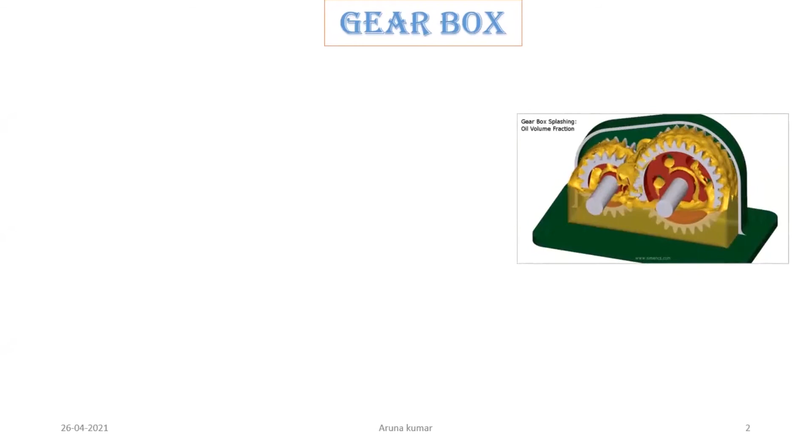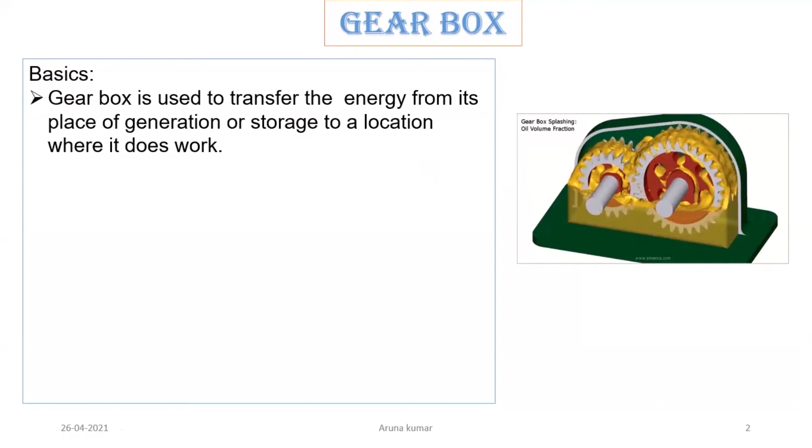So first we'll see a typical gearbox. You can see here it is rotating - this is a single stage gearbox which is rotating. As I explained, a gearbox is used to transfer energy from its place of generation. The place of generation is your prime mover, to the location where it does work. So depending on your work, where we are using it, we will be transmitting the power to that.

The gearbox can be of two types: it can be a step up drive or step down drive. Step up means, in the case of step up versus step down, the words we use - step up and step down - are with respect to speed.

It is not with respect to torque. We always talk step up and step down with reference to speed only, not torque. Step up means increasing the speed, step down means reducing the speed. But in most cases, 95% of the time, we use a reduction in speed drive, that is step down gearboxes only.

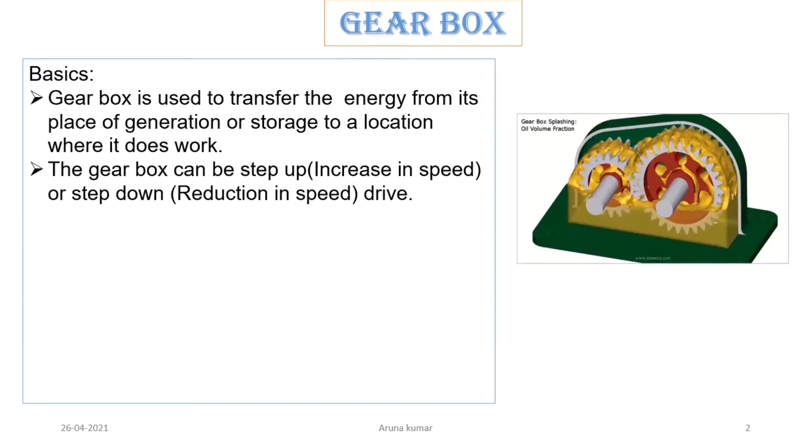Why do we use step down gearboxes? Because in step down gearboxes, the speed is coming down, and when speed comes down, torque increases. We require higher torque, particularly when starting and moving the element from a lower speed to a very high speed.

So always we go for a higher torque purpose. Most cases, 95%, will be using a step down drive only. It doesn't mean step up drives are not there, but chances are very rare, because the output shaft torque always will be more than the input shaft. So they are called reduction gearboxes, meaning speed comes down and torque increases.

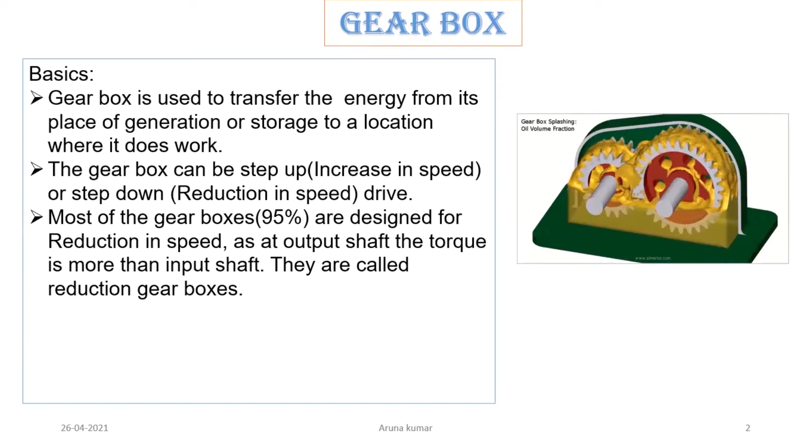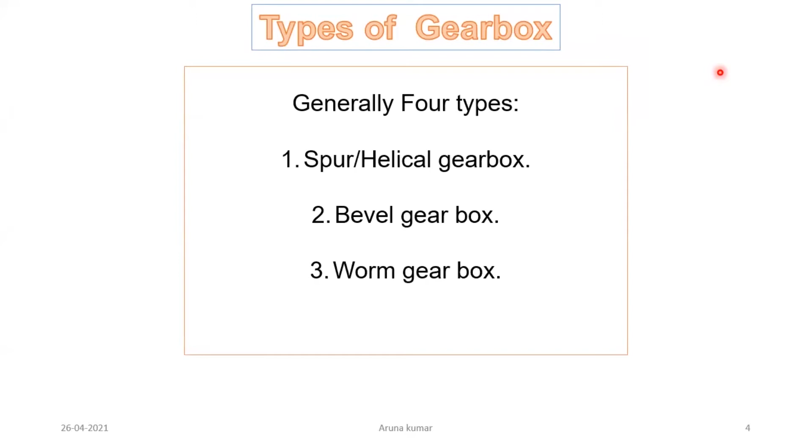What types of gearboxes are there? Generally 4 types with reference to the type of gears we use. One is spur and helical gearbox. Second is bevel gearbox. Third is worm gearbox. Next is planetary gearbox.

It is the spur and helical gearbox, bevel gearbox or worm gearbox - why we call them separate is because of the input to output side relationship, depending on your application. If you require parallel shafts, you go for spur and helical gear. If you want the transmission moved at 90 degrees, you use a bevel gearbox. If you have a non-intersecting and non-parallel arrangement, and want very high reduction, you go for a worm gearbox.

The fourth one is a planetary gearbox, which nowadays is becoming more and more useful in EVs, particularly electrical vehicles of 4-wheelers. Mostly planetary gearboxes use spur and helical gears only, but you get very high reductions, depending on the methodology of manufacturing. In this case, the output to input will be almost inline - meaning the input axis and output axis will be in the same line. In that case, planetary gearboxes can be used.

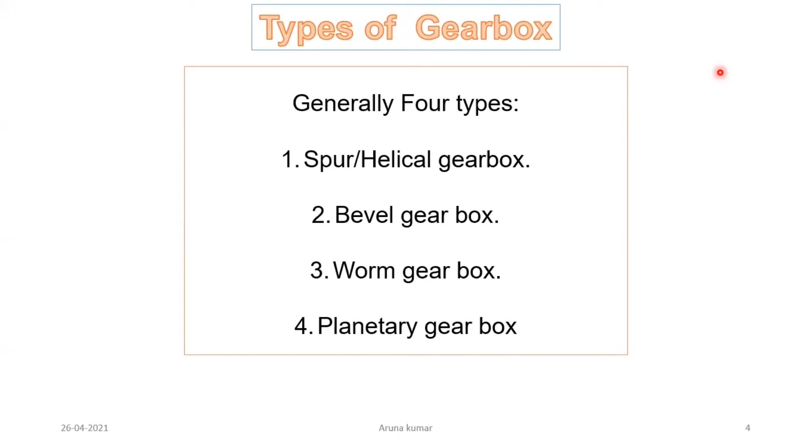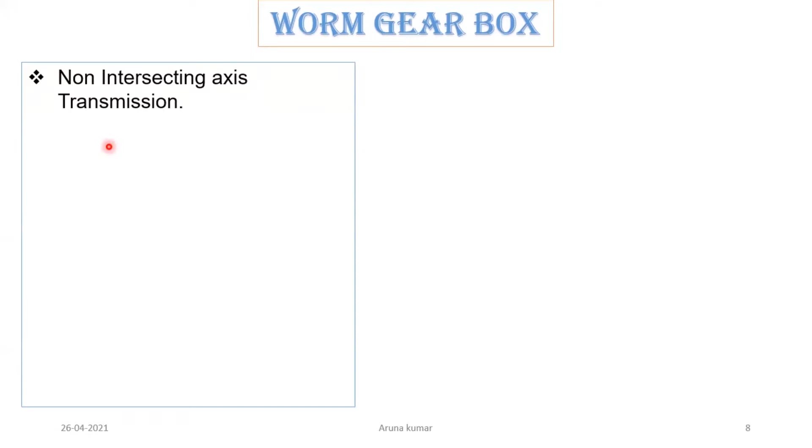This is one important thing in worm gearboxes compared with spur, helical and bevel gears - you can get very high reductions, in one single stage itself. Depending on the selection, you can go up to 100:1 reduction very easily using a worm and worm wheel.

I'll talk about non-reversible - what non-reversible means is low efficiency. It will be 30 to 80% efficiency only. It cannot have very high efficiency because the reductions will be more. The important reason efficiency is low is because this is a non-intersecting axis.

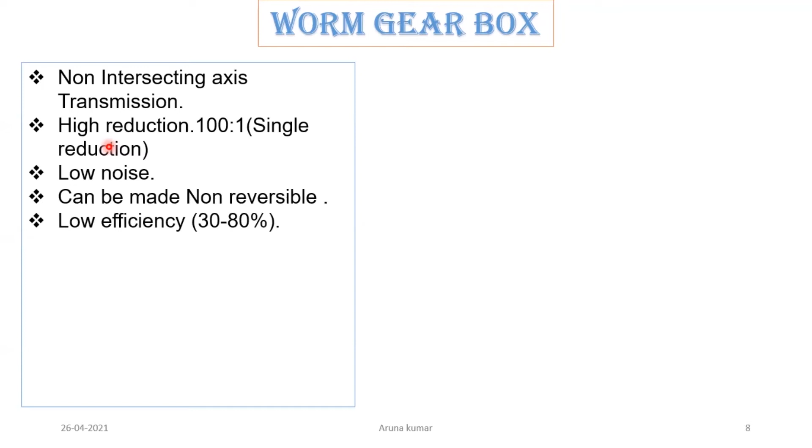I'll show you the picture, then you may understand. When you come here, you can see, sir, this is your worm, that is the input shaft. Here to fix the motor, they have given a flange. This is the output shaft. If you really understand, when you rotate the input shaft, it moves this one - not just like a spur and helical gear with only rotary motion. Here, it is not only rotary motion, there is more of a sliding action, a linear motion will be there.

Linear motion means actually this doesn't move, but because it is a worm, the movement will be like a screw and thread, screw and nut. The axis movement will be a sliding action. The movement from worm to worm wheel will be through a sliding action, not a rotary motion.

In the case of spur and helical gears, there is contact and continuous rotary motion. In helical gears, slight sliding motion will be there. Whereas in the case of worm and worm wheel, the motion is 80 to 90% through sliding action only.

Because the sliding action is more, wherever sliding happens, a lot of heat gets generated. Just take your hand, put it on your table, and slide your finger - more heat gets generated. Whereas if you rotate your finger on top of it, heat will not be generated. Sliding means it's moving in a linear movement, and more movement means more heat generated.

So anywhere, whether it's gears or anything, any sliding motion will cause more heat generation. More heat generation means more loss - efficiency will be less, because heat generation causes loss of power. Because of that, power efficiency will always be very low. That's why we get only 30 to 80%.

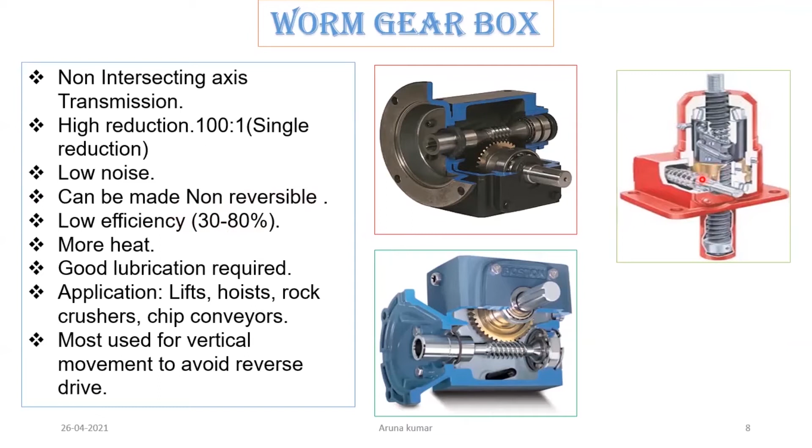So for this slide, if you connect a ball screw to a vertical slide, and motor power stops during operation, if the axis rotates back due to the weight, it should not damage the other side of the equipment. To avoid that, if you use worm and worm wheel, it will not allow reverse rotation because of the locking between worm and worm wheel. That's why it can be made non-reversible if you design the worm and worm wheel such that the lead angle is not more than 6 degrees.

So now, sizing or designing of a gearbox. The important aspect is as soon as you decide to design a gearbox, certain things you have to start worrying about.

One important aspect is it has to be designed for its required load and application. Required load means what load the gearbox has to take care of, not just force but converted into power or torque. The two important factors for any gearbox are: the output shaft connected to your equipment, what power or torque is to be transmitted, and at what speed.

These are the two important things: either power and speed, or torque and speed. These will indicate the load coming into the picture. For torque and speed, you have to design the gearbox.

So from the application point of view, what does application mean? Is it for continuous operation or intermittent operation, a heavily loaded application, or is it going to work for 24 hours or only a few hours? Another factor is whether you are going to operate this gearbox at one speed or different speeds. Depending on the number of speeds and operation, the type of motor you select will vary.

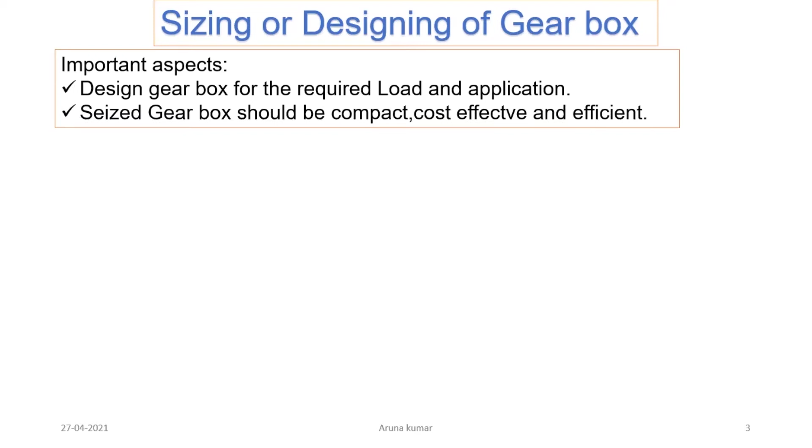It should be cost effective and efficient. Efficient means it should operate without much problem - its transmission efficiency should be as high as possible, and it should not fail regularly. You have to design the gearbox so it works for the planned life - it may be 1 lakh revolutions, 1 lakh hours, or 2 lakh hours. For that number of hours, it should work without failure. You have to finalize this and then make the gearbox.

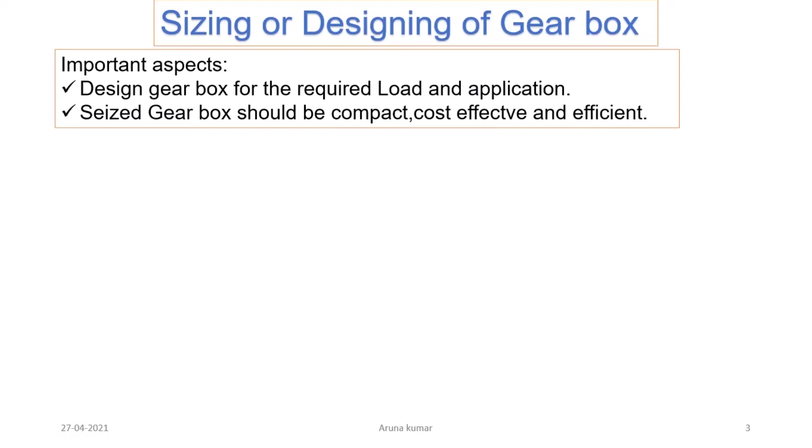Taking these two into consideration, the design of the gearbox has to be planned. These are the major, important initial things. To achieve this, what are all the factors we have to consider? We'll see here.

Factors to be considered. One is the service factor. People can also call it a factor of safety. Why I'm using service factor here instead of factor of safety, I'll tell you. One way it is a factor of safety - how much safety you are giving it, service factor.

Service factor means important is how many hours of working. The equipment you are going to connect to this gearbox - if it is working for 8 hours in a company, or working for 12 hours or 24 hours, based on that the service factor can be decided. If it is 12 hours, you have to use one service factor. If it is 24 hours, something else. If you are using 8 hours, a service factor has to be considered differently.

So hours of working, how much - that also we have to clearly write. Before designing a gearbox, we have to write down all these factors on a piece of paper: how many hours my equipment is going to work. Based on that, your service factor will come into picture. That you have to note down.

Then uniform or non-uniform load or shock loads. That means if the gearbox is connected to your equipment and it is just running continuously with the same power, same speed, and no loads are changing at all, then we call it a uniform load. Continuously same speed, same power, load is there, so same power it will be drawing - that is uniform load.

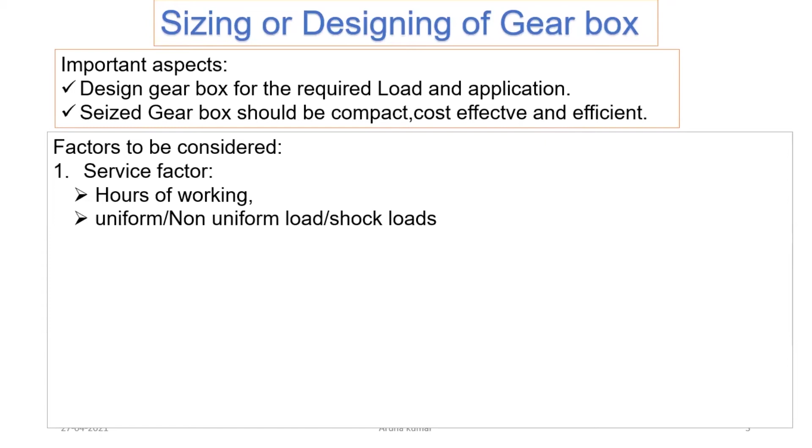Suppose a chip conveyor is there - sometimes it may be carrying, let us say, 5 tons. Suddenly you may try to put more load into that, 5 tons may become 6 tons. So sudden shock load variations are coming - that also we should consider. Based on that, service factor has to be fixed. These are also things you have to note down on a piece of paper before starting a gearbox design.

Then the third one is operating at elevated temperatures. Where the gearbox is going to be put, are we going to keep it in a controlled atmosphere or a different atmosphere? Suppose if you are putting that gearbox somewhere outside the factory, exposed to environment, water, dust and everything, then you have to think differently for elevated temperatures. Elevated temperatures means suppose the gearbox is placed somewhere like a furnace or casting yard.

If you are putting it in casting yards, the temperatures will be ovens and all - very, very high it will be there.

Maybe 200 degrees, 300 degrees, but the environment may, instead of ambient temperature of 40 degrees, go up to 80 or 100 degrees. Based on that, you also have to think about the service factor you have to give. You may have to give a slightly higher service factor. That also we have to consider when deciding the service factor.

Normally if the hours of working is 8, and it is a uniform load and you are working in a controlled environment, a service factor of 1 is okay for you. But if it is 12 to 24 hours of working with non-uniform load, then a service factor of 1.5 is more than sufficient for most applications.

No sir, my application is such that very heavy shock loads will be coming and temperature is very, very high. In that case you can go up to a service factor of 2.

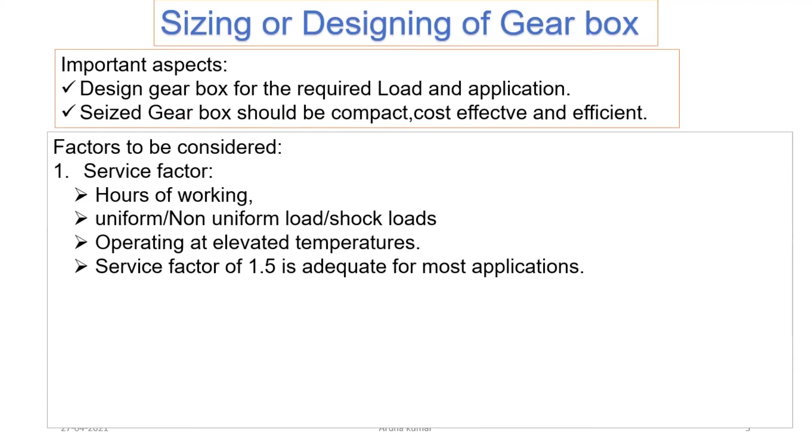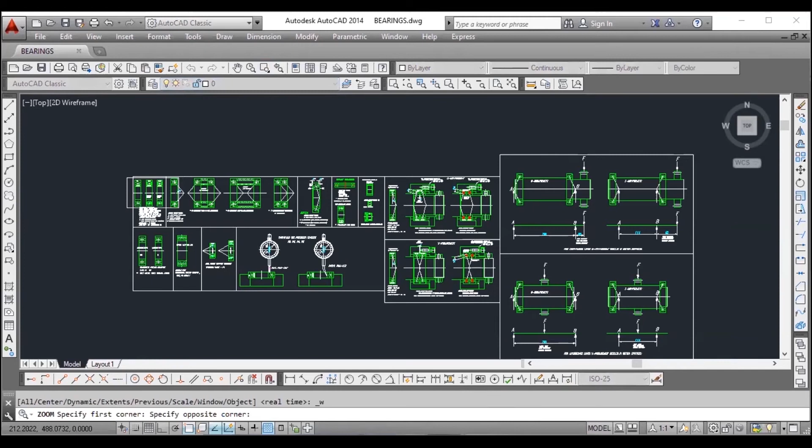Things are all visible. Generally, as we know, in mechanical things, all are visible things. You can feel it, you can see it, and then you can assess their function. So one such element we can discuss today, let us first touch upon bearings in a gearbox. As we all know, what is a bearing? Bearings generally separate two relatively moving elements, two elements which are in relative motion.

There are two kinds of relative motion in any engineering application: one is sliding, linear, and another is rotary. So necessarily one has got a stationary element and another a moving element. Wherever there is a joint of stationary element and moving element, be it linear or rotary, that is the point of concern for a mechanical engineer, how to deal with that kind of joint.

This joint is called a dynamic joint. There are two kinds of joints: one is a static joint and another is a dynamic joint. A static joint is one where you just bolt two surfaces together, that's it, there is no relative motion for a lifetime. But here it is not like that, it is a joint of concern, actually.

It is a dynamic joint because relative motion takes place at that particular place. How to deal with it? Way back, the simplest joint is a sliding joint. Two things just keep one over another and keep sliding, so it becomes a dynamic joint. This is what we call guideways.

A similar concept can also be used for rotary joints. You have got a bush and you have got a shaft. Shaft is stationary, bush is rotating, so it becomes a joint, it becomes a bearing. It could be anything; shaft can be stationary, bush can be rotating. So one is a stator, another is a rotor. Anything can be the stator, anything can be the rotor.

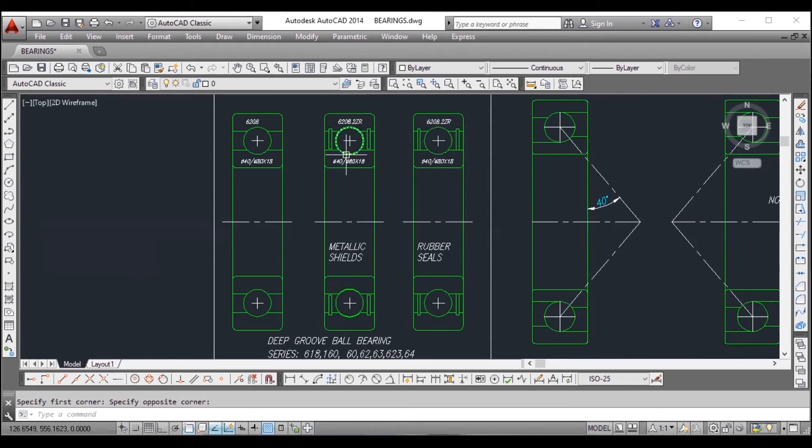Here you see, this is the rolling point in the inner race, this is the rolling point in the outer race. So things are very hard. Balls are hard, races are hard. So all hardened material, and that there is a rolling joint. So they have got a very, very long life. And even after years of use, hardly any play or backlash is created.

So that is where this rolling bearing comes into picture. Today, nobody talks of bush bearing. Bush bearings are there still, of course, but for low speed application. But today, what we are talking about is a state of art application, that is a rolling application.

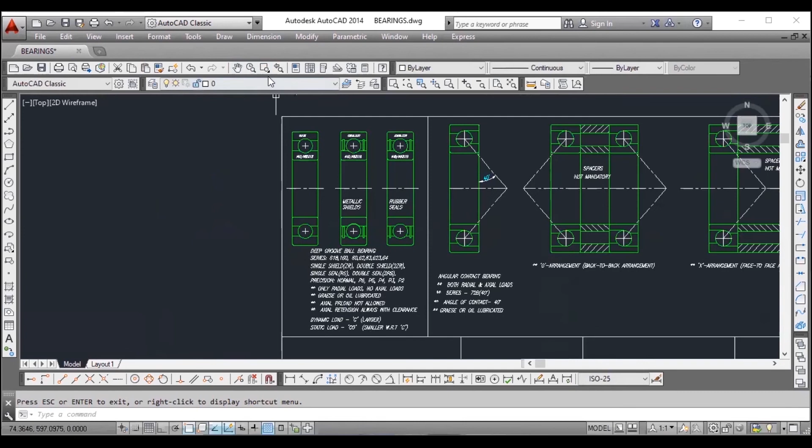So to come to our rescue for this dynamic joint, we have a battery of bearings, a series of many kinds of bearings. They have their own application. So here you see the simplest is this, what is called deep groove ball bearing.

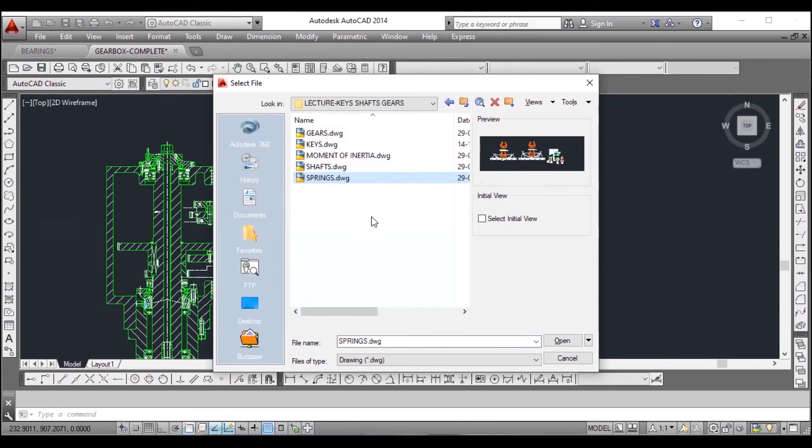Now, let us come to the other elements, shafts and keys. Let us see what are the parts played by the shafts and keys. Keys, shafts, and gears. Let us give a key.

All of us know what is a key. Key is used for transmitting the mechanical power. That's all. So here is a simple application.

Let us say there is a lever and there is a hinge. If I don't have this element, if I remove this element, it becomes a hinge joint, which cannot transmit the torque. If I have to transmit the torque, you have to create this key. So this key will become the transmitting element between driver and driven. So now if you apply a load here, this I have shown as a lever, but it is not a lever. It can be gear, it can be pulley, it can be anything like this.

This is the size of the gear, the size of the pulley, where at the periphery there is a driving load, a tangential load. From this full circle, I have just cut a small piece, calling it a lever. But don't consider this a lever, it is a pulley or it is a gear.

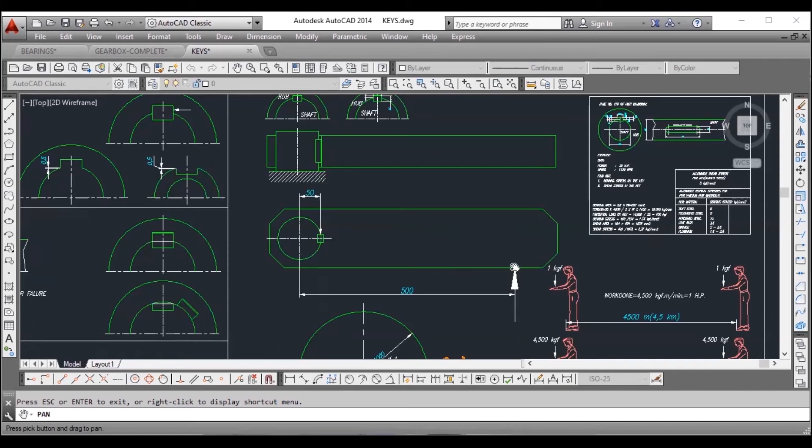So here, what are the factors? When you apply a load on the radius of the driver, like pulley or gear, this load is felt by the key. So now it is the key which is responsible to bear this load.

The load which is appearing at the periphery, multiplied by the radius of the pulley—say in this case it is 500, theoretically I have put—so the product of this load, so many kg, multiplied by the distance or radius of the pulley or pitch circle radius of the gear. This becomes the torque. The definition of torque is this.

This torque induces enormous responsibility on this key. The key is located at the periphery of the shaft, but the load is applied much farther away compared to the shaft. Here you will appreciate that if this load is 1 kg, the effect of this 1 kg is 1 kg into 500.

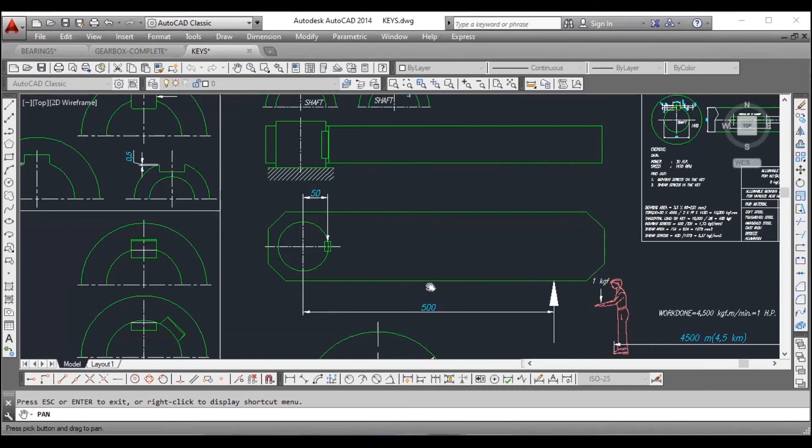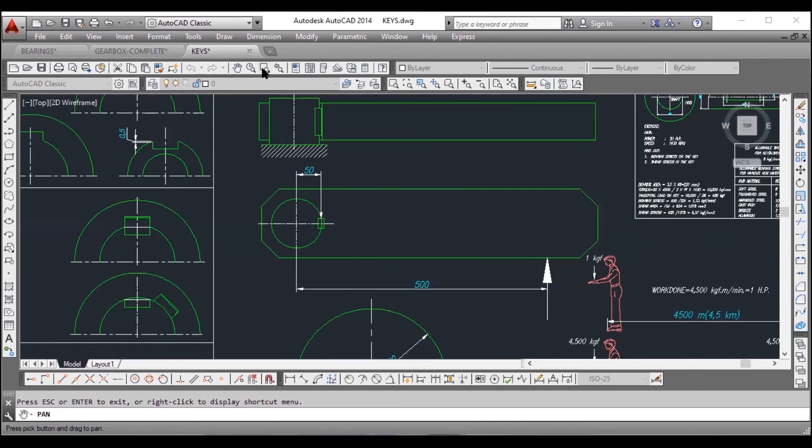Shafts. Let us see why shafts matter and how the shaft plays a role in a gearbox. A simple gearbox is shown here. There is a motor.

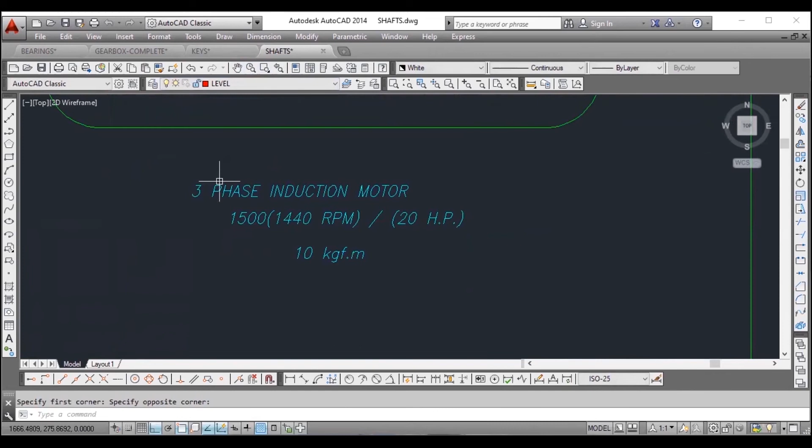Motor specifications are: 20 HP, 1500 RPM, actually rotates at 1440 RPM, and it gives a torque of 10 kg meter. From the same 2 pi NT by 4500 equation, we are getting 10 kg. So that is the prime mover which is attached.

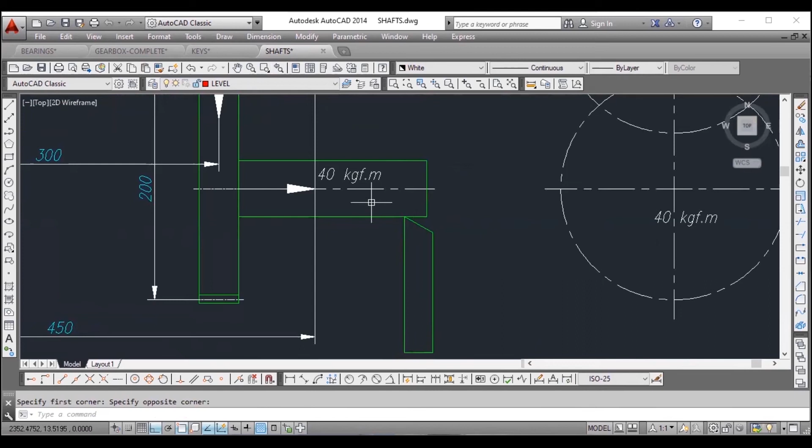And this is our spindle, the main spindle, where the tool is waiting, and this is a component. You want to machine this component using this drive.

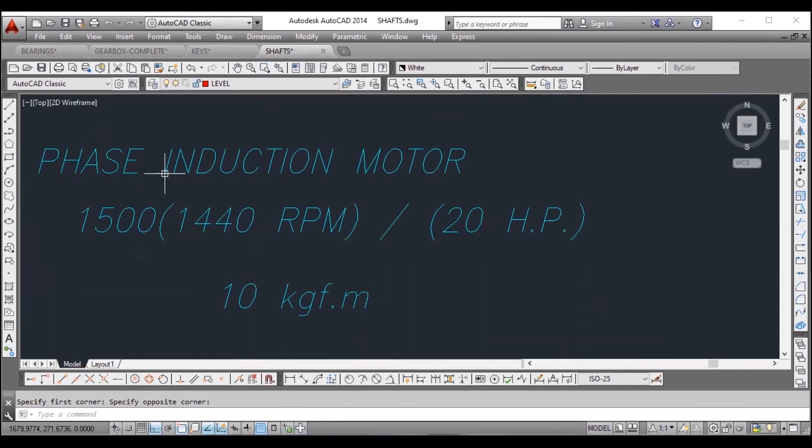See what happens—you don't want to use this machine at 1440 RPM. The machine is capable of 1440 RPM, but if you give the entire thing, it will be too much. For this, it will not honor the cutting speed.

You have to rotate the workpiece to honor the recommended cutting speeds and feeds, right? If you are using a carbide tool, its permitted cutting velocity is 150 meters per minute. Diameter of the job, let us say, is 200. So the peripheral speed of the workpiece should be 150 meters per minute: pi DN by 1000 should result in the permitted velocity.

So our requirement comes from this cutting zone. This is the speed I want, 500 RPM, but the motor is giving 1440 RPM. So I have to modify the speed without sacrificing the power. At the same time, I want the entire 20 HP power here, otherwise my cutting will not be efficient—I cannot give the depth of cut. So in such cases, let us see what happens.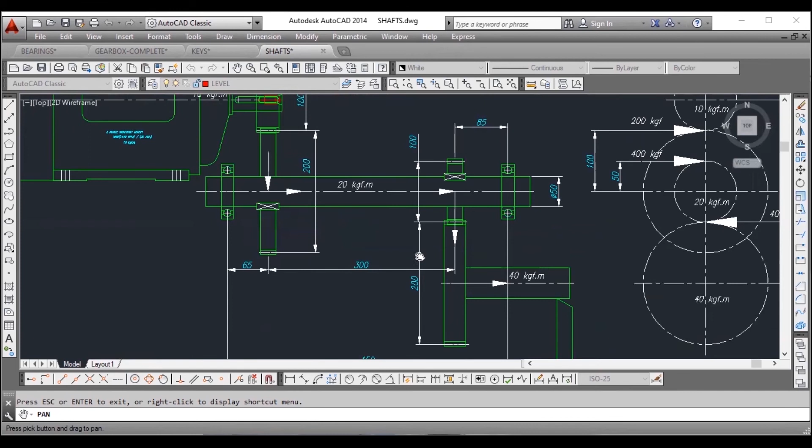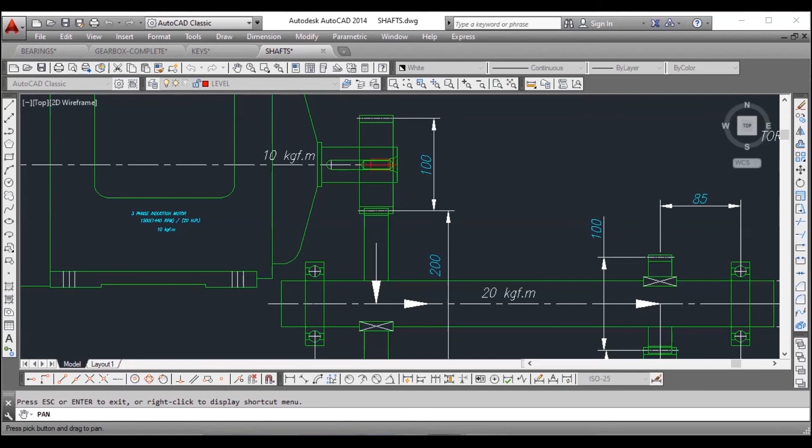This is a gear here, PCD is 100. And here we know the 10 kg meter torque. We understood what 10 kg meter is—it's a product of force into distance. It need not be a lever; it can be a gear, it can be a pulley. So 10 kg meter means—now you will see, I will make it more clear.

Same thing I have shown in the end view. This is the motor shaft, which is generating a 10 kg meter driving torque. 10 kg meter is nothing but: the radius of the gear is 50, diameter of the gear is 100, so the product of tangential load and the pitch radius of the gear should be 10 kg meter, or 10,000 kg mm.

I know the radius of the gear. To reach this 10,000, there has to be a force of 200 kg. So this motor is able to push or generate a load of 200 kg at a distance of 50—50 being the radius of the gear. So by this much force, the driven gear is getting pushed. This is the driver—one gear is a driver having a capability of a tangential force of 200 kg.

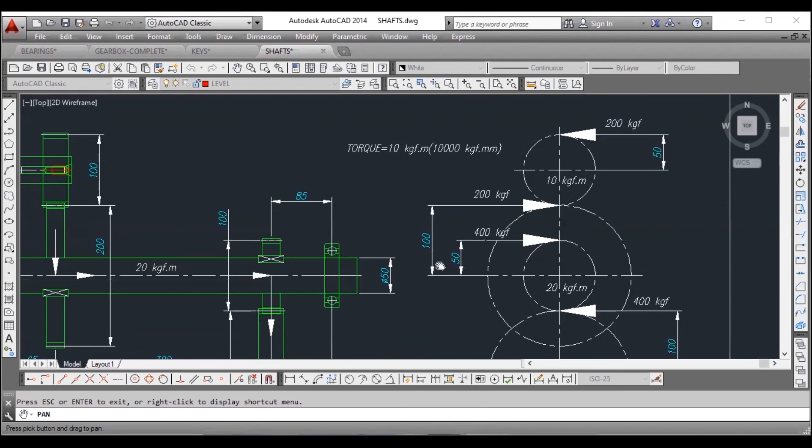So with this 200 kg, it is pushing a larger gear on the other shaft, which has a diameter of 200 instead of 100. So at this point of contact, the push load on this gear and the push load on that gear will be the same. But this 200 kg push load results in a larger torque on this gear because you are pushing it at a radius of 100: 200 into 100.

So it will become double—this will become 20 kg meter instead of 10,000, it becomes 20,000 product. So this shaft is subjected to double the torque—instead of 10 kg meter, it will experience 20 kg meter. This 20 kg meter is nothing but the pushing force of the driver multiplied by the radius of the driven: force into distance, force into distance. So a product of 20 kg meter means the shaft has to be a stronger shaft.

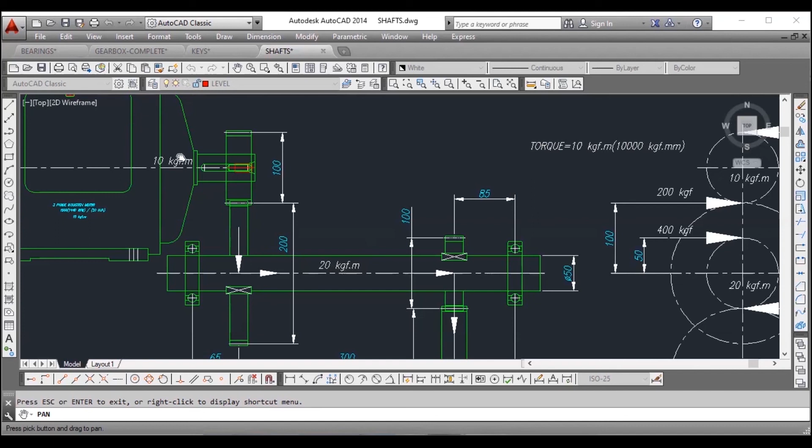So this keeps on getting multiplied, and this is what is called 1:2 reduction. If you reduce the speed, you are increasing the torque. You reduce the speed to half. If this rotates at 1440 RPM, speed of this will be half of it, 720 RPM, but the torque will be doubled. So the product of speed and torque will be the same. Here speed is 720 and torque is 20; here speed is 1440, torque is 10. So the product is the same, meaning the HP of the motor and HP available on the shaft is the same. There is no power loss.

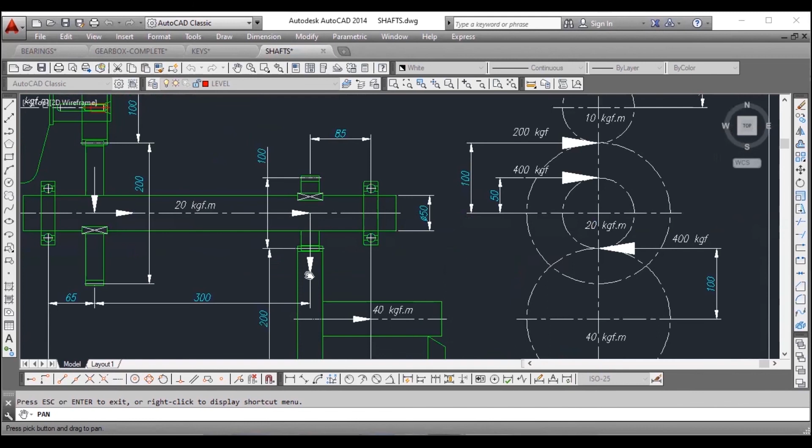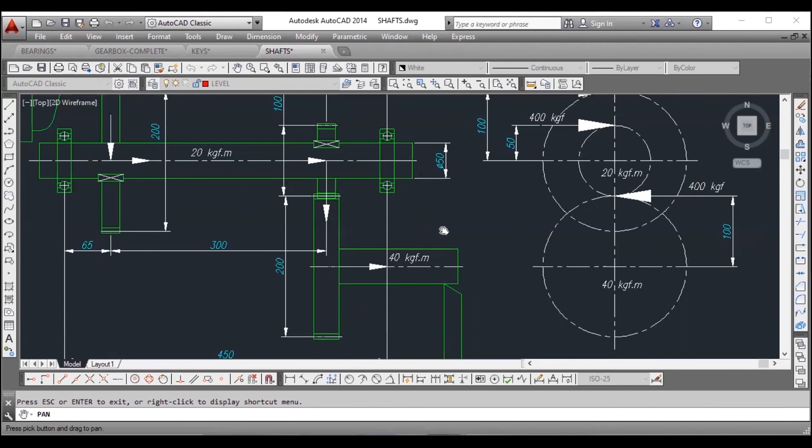Speed has gone down, that is to your advantage. You wanted less speed without a loss of power, so that you achieve. Similarly, one more step of 1:2 will further enhance the torque and further reduce the speed, from 100 to 200. So 1:2 reduction plus 1:2 reduction means total 1:4 reduction. 1440 RPM will appear as 1/4 of that, so 360 or 365 RPM, this job will rotate, but gives full power. Torque will also further enhance. Here 10 became 20, here became 20, became 40, because speed is reducing, torque is doubling. So at this shaft, ultimately you have a very good power, same power of 20 HP, and torque is also available, 40 kg meter. Very, very strong situation. It can take any amount of cut. Power is available, torque is available.

Okay, once again. So we'll discuss how gear lubrication and gearbox lubrication will take place, how much is the quantity, and what type of lubrication is to be used.

We'll have to discuss this because gearboxes without lubrication is very, very tough for us, as a lot of heat gets generated. The heat has to be taken out and cooling has to be done for gear lubrication so that the overall temperature will not increase. Increase in temperature will cause problems not only for the gears but also for the bearings working inside, because gears may take a little more heat compared to bearings. Bearings, if they go beyond a temperature of 75 to 80 degrees, slowly they become decolorized, and once decolorized, they start deteriorating very fast. So it is not only lubrication of the gears, it is also lubrication of the bearings.

So what is the purpose of lubrication? Now we'll see.

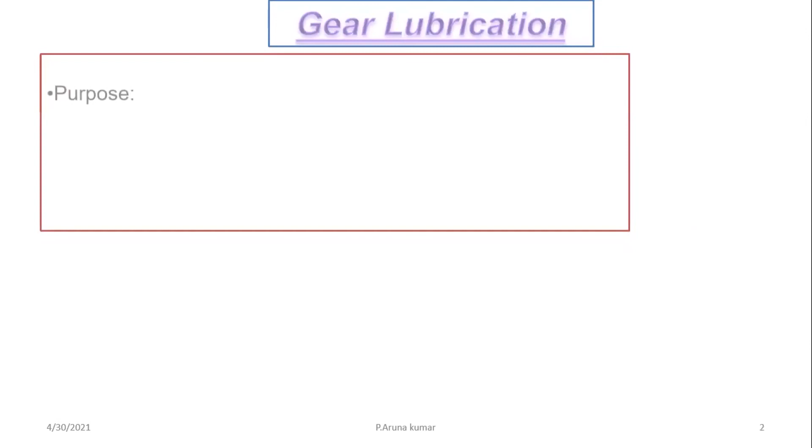As there is sliding and rolling contact between gear teeth, a lot of heat gets generated. Spur gears are made of rolling contact only. If you go for helical gears, bevel gears, or worm gears, both rolling and sliding will take place. In worm wheels, it will be worm and worm wheel, and the sliding is very, very high. Not only in gears but anywhere, if it is rolling continuously, it will not generate much heat - they say a rolling stone won't catch any dust. Like that, rolling will not generate much heat, but sliding generates a lot of heat. So sliding type gears like spiral bevel gears, or worm and worm wheel, will have a lot of sliding contact, so a lot of heat gets generated and has to be taken out from that position.

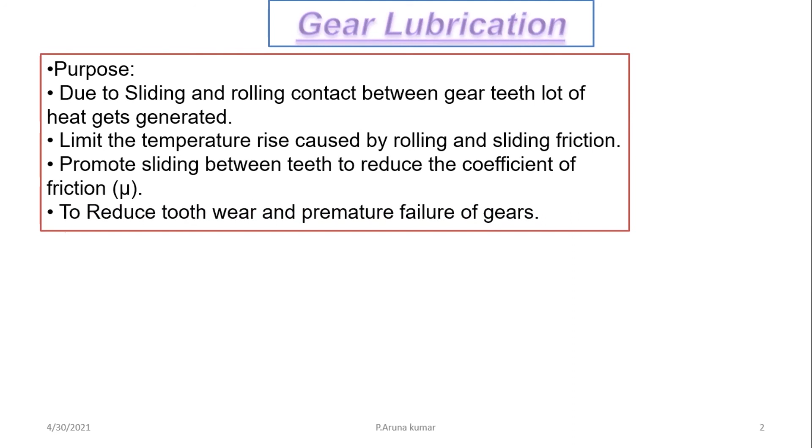So we have to limit the temperature rise caused by rolling and sliding friction, promote sliding between the teeth, and reduce the heat. One more important point: in between the two contact points, we require a thin layer of lubrication. This thin layer of lubrication reduces the coefficient of friction. Once the coefficient of friction is reduced, the heat generated also reduces. So not only does the heat generated have to be taken away, but also the coefficient of friction has to be reduced. There should always be a thin layer of lubrication between the two teeth in contact, which will reduce tooth wear and premature failure of gears. So these are the purposes of gear lubrication.